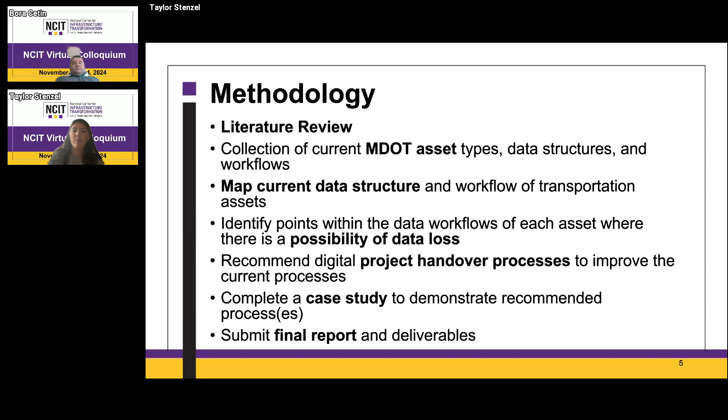Then we'll complete a case study on one of the asset types using real data from MDOT to demonstrate these recommended processes that we have. And then finally, we will submit a final report with the project deliverables.

So for the sign workflow, the region and the TSC decide, okay, we need a sign in this specific location. They'll submit a job into JobNet, and then the sign design team will design the sign. They have templates already made at MDOT that the design team can pull from ProjectWise and make edits to, and then share their finalized designs to sign review. The sign review team will review the signs and make comments or give the all clear.

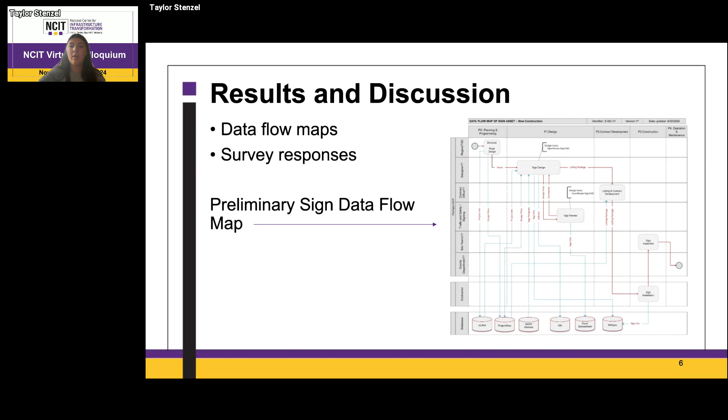Some future work the team is going to be working on: we're currently coordinating interviews with contractors. This will let us identify what problems the contractors are experiencing with data sharing and working with 3D models, and get their opinions and thoughts on moving forward with more digital data sharing.

Then we're also going to identify points of data loss. Since we're almost done with the data flow diagrams, we'll be able to see the points of data loss and define possible solutions. Then we're going to conduct a case study, and we're estimating to do this case study on signs. And then we're going to develop guidelines for future use.

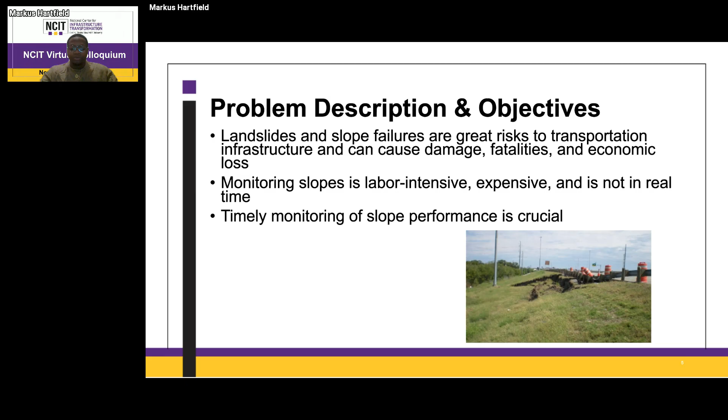Our objectives for this research project were to develop a low-cost monitoring system, collect data and analysis in real time, develop a protective and early warning mechanism, as well as create a system for field application.

For our methodology, we have 6 total sensors, but only 3 types, so we have 2 of each. The tilt sensor is the device used to measure the angle or tilt rotation of the structure, such as the slope or embankment, and we have 2 of those tilt sensors at the top of the slope.

The tensiometer is a device used to measure the soil's matric suction or water potential, indicating the moisture content and cohesion within the soil. Higher suction means the soil is drier, which affects slope stability. We have 2 of those under the slope.

Then we have the co-located moisture sensors. It's a moisture sensor installed at specific depths that ensures the soil moisture and matric suction data is accurately recorded from the same point underneath the slope.

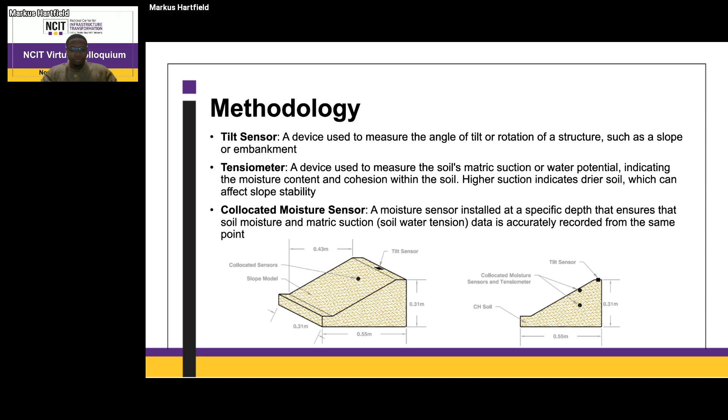Here we have our soil properties. I'm going to take a little time to explain what each of these are. We have our liquid limit, plasticity index, specific gravity, fine fraction, soil classification, OMC, and MDD.

The liquid limit is the water content at which the soil changes from a plastic to a liquid state. Our range is 65 to 71%. As long as it stays within that range, we're operating within a safe limit. If it goes below, the soil is too dry. If it goes above, it starts to go into oversaturated territory, which is when you have landslides and mudslides.

The plasticity index is the water content at the change from a plastic to a semi-solid state, and we have that at a range from 39 to 48%. Again, as long as we operate within this range of values, we're within safe parameters.

Specific gravity is just with the type of soil that we have, and that goes to the soil classification, which is CH, which is like a fatty clay soil. Our fine fraction is more than 95%. Fine fraction is literally how many fine aggregates are within the soil content that we had for our sample, and we had a little over 95%.

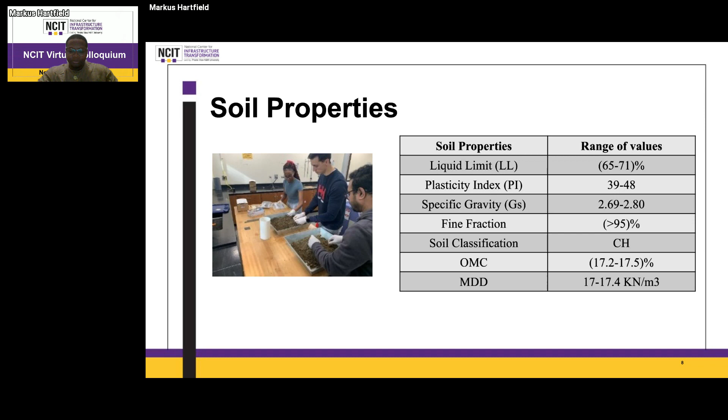All right, these are some of the variables that we monitored. Slope tilting and rotation, also known as pitch and roll. These are terms describing the rotational movement of the slope. Pitch refers to the rotation parallel to the slope, and roll is perpendicular rotation. These metrics help in detecting small slope movements. Volumetric water content, VWC, is the variation in the soil.

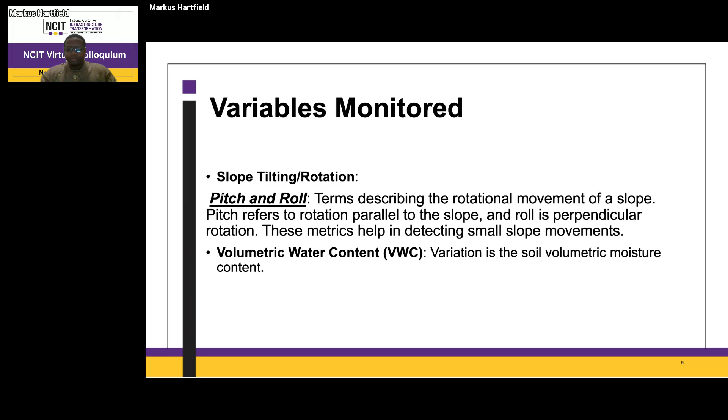Our future objectives are to integrate advanced machine learning and predictive analytics, optimize for low cost and scalable development, develop comprehensive early warning systems, as well as enhance the user interface for broader usability. Do you have any questions?

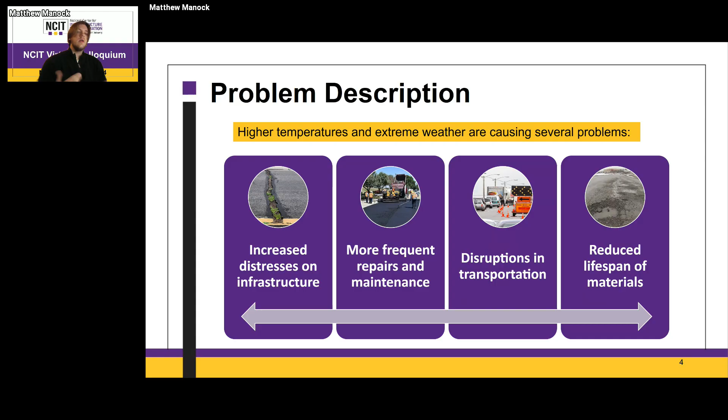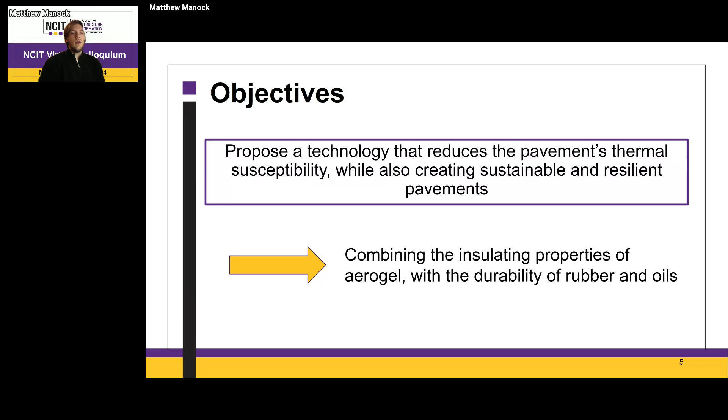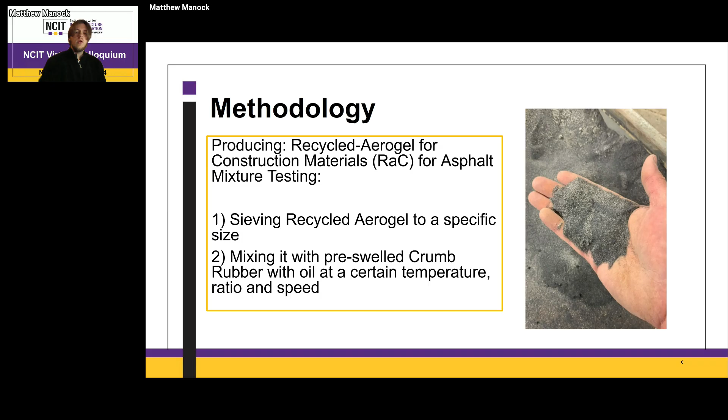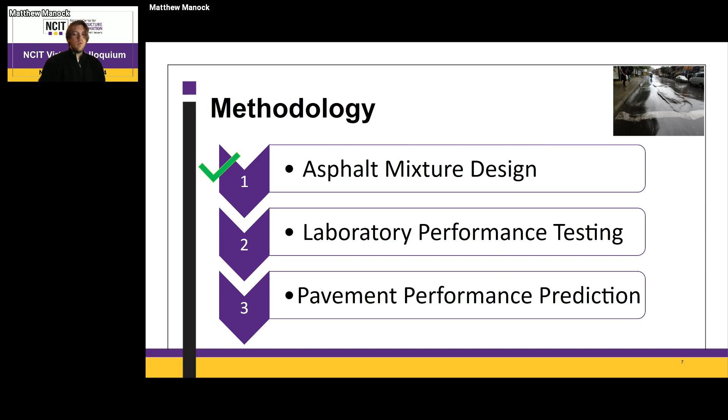But in essence, it's sieved recycled aerogel for the specific sizes. And then it's mixed with the crumb rubber at certain temperatures, ratios, and speeds, because we were trying to find the most optimal way of doing it. So that was the first step of the three main steps that we're working on, which would be the mixture design. The next two steps would be laboratory performance testing, which I have been doing for the past couple months, and then pavement performance prediction, which will be in some time.

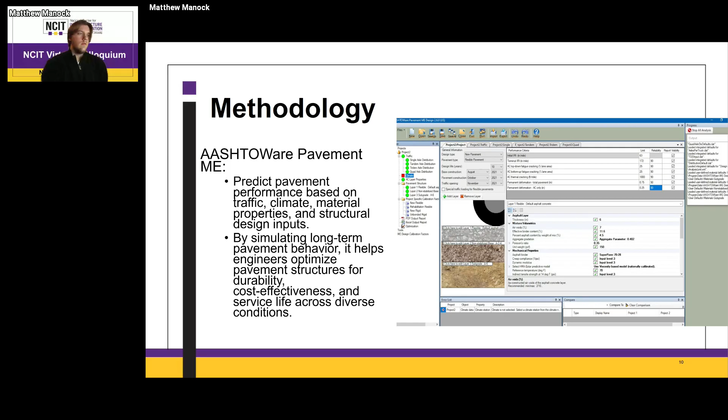And lastly, we will go over the methodology for the AASHTOWare Pavement ME. Again, haven't worked with it yet, but it's very exciting. It helps predict pavement performance based on all the different properties, climate, material, traffic, and like it says there, it simulates long-term pavement behavior and helps optimize pavement structures for durability, cost effectiveness, and service life. So using the technology will, in short, reduce the use of raw materials, reuse waste materials, improve production processing costs, and lower energy consumption and waste generation. Big stuff. We need to start doing these things if we're going to make a difference and really make an impact on our roadways and actually make them better.

Lastly, for future work, we haven't got there yet, but we will prepare samples for the performance testing. We'll run these tests and determine the effect of adding the RAC, different variations, to see what the most optimal use of it is in terms of stiffness, rutting, and cracking. And lastly, we'll assess the pavement performance based on the predictions we've made. And we will run life cycle cost assessment and life cycle analysis.

Do you have any questions?

Thank you for an excellent presentation, Matthew. Appreciate it. Please feel free to use the question and answer tab to put forward any of your questions. While they do that, I have one question for you, Matthew. How do you envision your climate resilient asphalt pavement design being implemented on a larger scale?